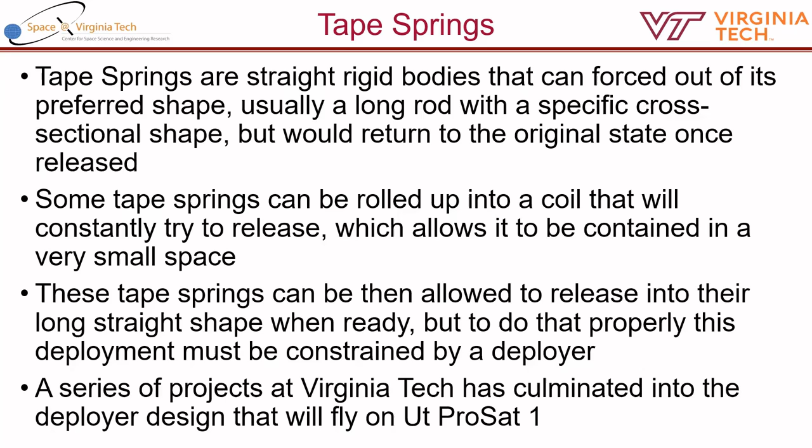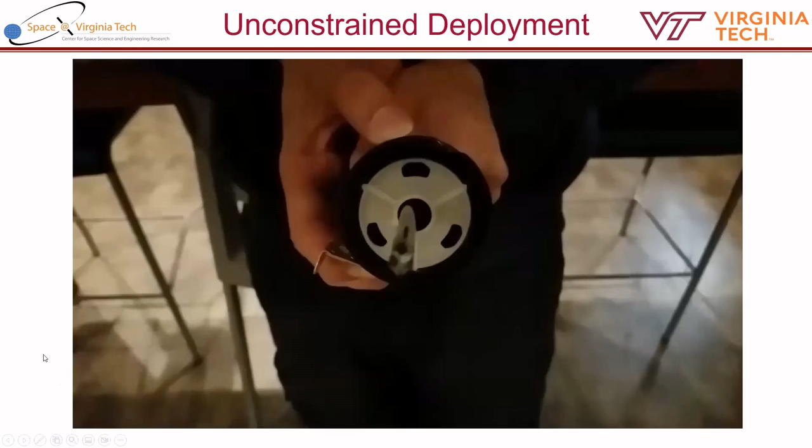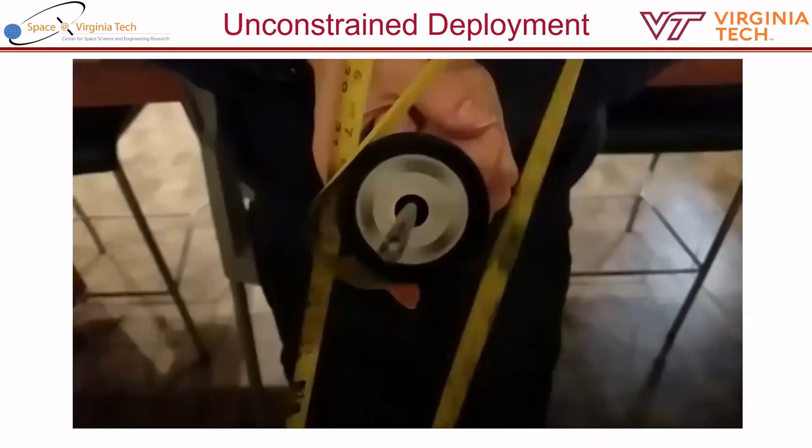Now, here's what an unconstrained deployment of a tape spring looks like. It's a bit glitchy.

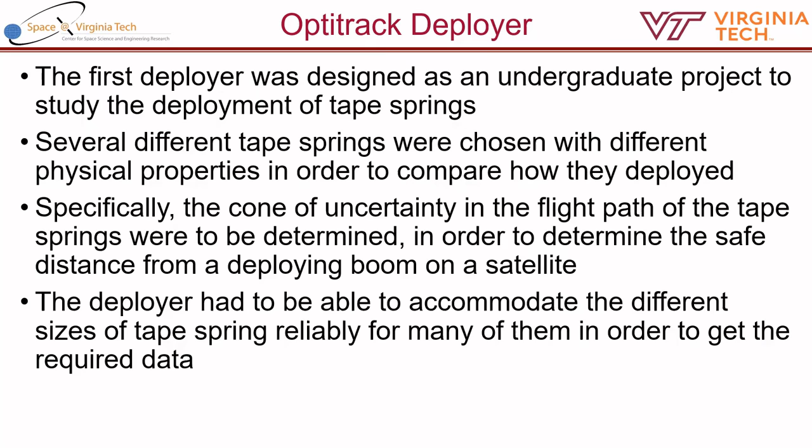The first deployer I worked on was designed as an undergraduate project to study the deployment of tape springs. It used several different tape springs to determine how their physical properties affected deployment. Specifically, we wanted to determine a cone of uncertainty in the flight path so we could determine if it was safe to launch close to another satellite object without hitting it. The deployer had to accommodate different sizes of tape springs reliably to get reliable data.

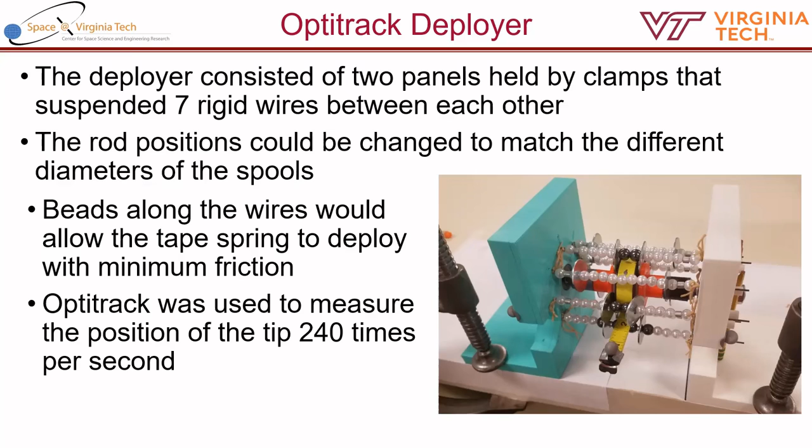So what we came up with as an undergrad was the first version: two panels held together by clamps, with 7 rigid wires suspended. The rod positions could be changed depending on the size of the spool we were using. We had simple beads that were able to roll and reduce friction during deployment. With this setup, we used OptiTrack to measure the position of the tip of the boom 240 times per second.

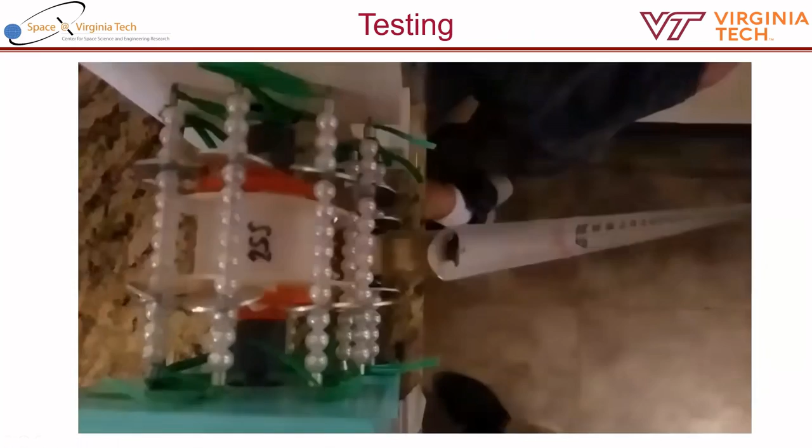That was a really fast deployment, about 5 feet. These are just general off-the-shelf tape measures, which are basically tape springs - they just have an internal torsion spring to make them retract most of the time. This deployer was very reliable, able to perform 50 deployments of each of the 5 different tape springs. Despite breaking in the middle, we were able to do repairs, but 250 deployments is not bad at all.

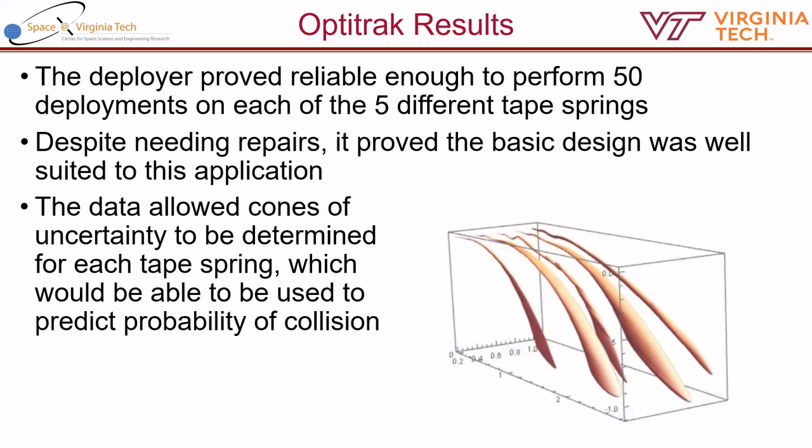With this data, we were able to create cones of uncertainty for each tape spring, which would allow us to determine the probability of collision with another object. You see this here, made in Mathematica.

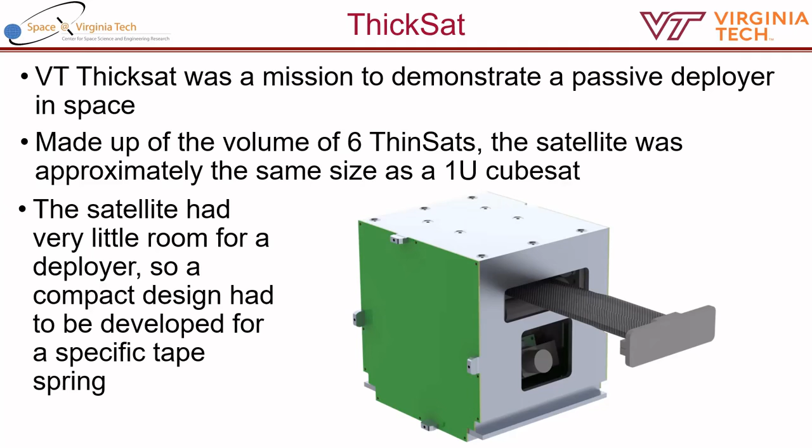Now, this went on to ThickSat - a mission I was put on that sought to demonstrate a passive deployer in space. It's called ThickSat because it was made up of 6 thin sats and ended up being approximately the size of a 1U CubeSat. The satellite didn't have a lot of room for a deployer, so we had to make a much more compact design developed for just one specific tape spring. This new tape spring was provided by NASA, much more sophisticated, made of carbon fiber layered with epoxy - much better for a space environment than whatever tape measures are made of.

This cross section is known as the double omega shape, which allows the beam to be very rigid - sort of like stretched omegas that are mirrored and attached at the tips.

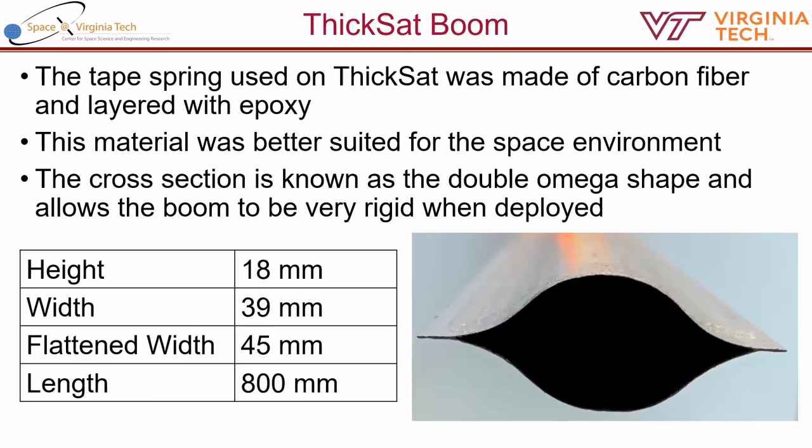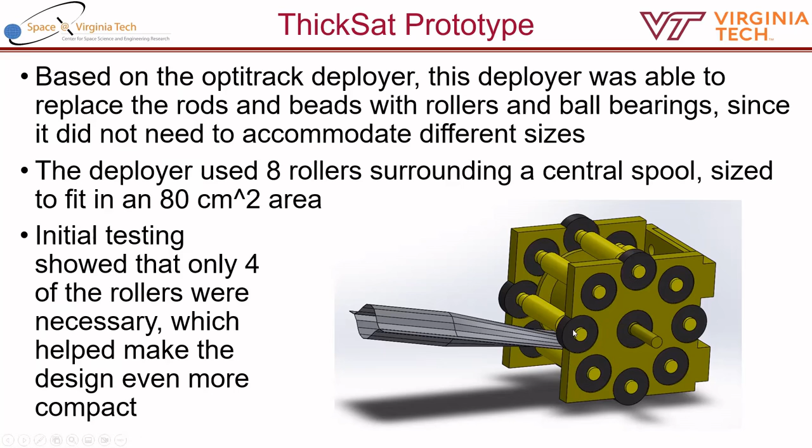The prototype we did was heavily based on the design from the OptiTrack deployer, because we were able to replace the rods and beads with ball bearings since we only had one size to deal with. It was all designed to fit in an 80 square centimeter area, and initial testing showed that only 4 of the rollers were necessary instead of all 8, which helped further compact the design.

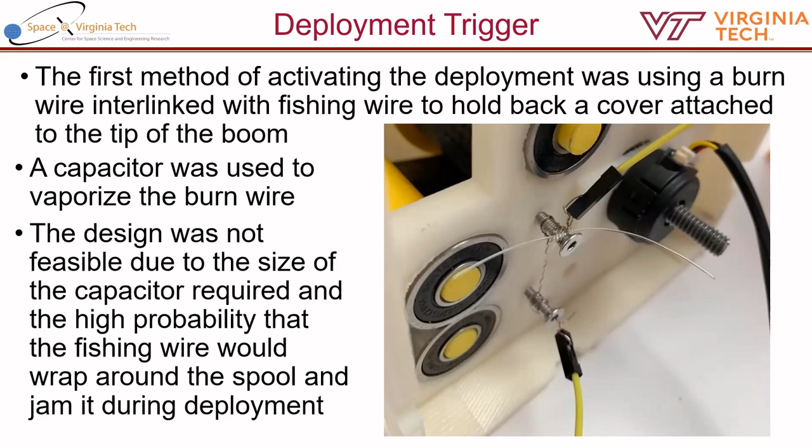What we needed for this to operate autonomously, which is brand new, we needed a sort of trigger that could operate by itself. The first method we tried was using a burn wire interlinked with a fishing wire that could hold back a cover on the tip of the tape spring. We had to use a large capacitor to vaporize the burn wire, but ultimately this was not too feasible, as the now-free fishing wire would often get stuck along the axle of the spool and jam it. Also, the capacitor was very large, almost an inch in diameter, if I recall.

The more reliable method, which would see future use, was attaching an arm to a servo that would fit into one of many slots on one side of the spool. When it was time to deploy, the servo would rotate the arm out of the spool, allowing it to deploy. This was a very secure design, as the rotation of the servo was perpendicular to the rotation of the spool, so the only way it could release under pressure was if the spool itself broke, which was nowhere close to ever happening. This became a staple in future designs.

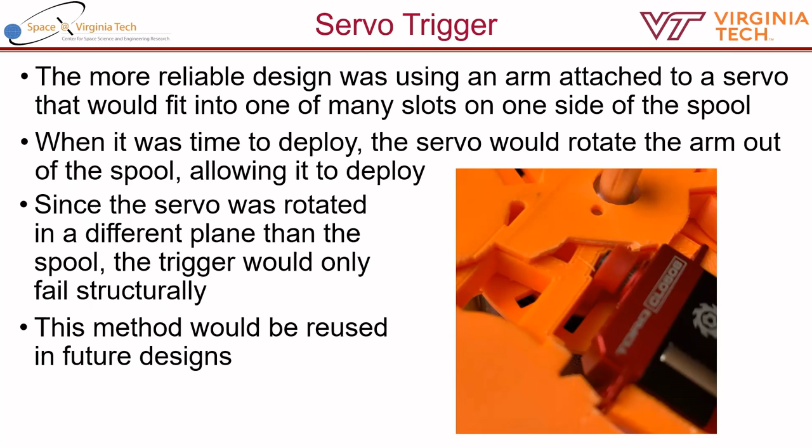The first successful deployment of this version then fell off, but it worked well.

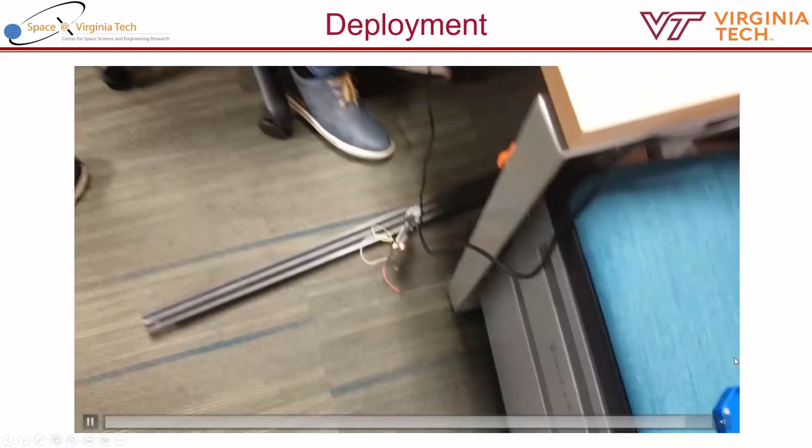We made some additional improvements for the final design. One of the corner rollers was replaced by two guiding rollers in the front to help direct the direction of deployment. We had an insert on the spool to put the base of the tape spring in, so it would be more secure. We made room for a camera attachment that would help confirm the deployment, and cut lots of holes into the side panels to save on mass. The structure was just two overlapping panels with screws, replacing something more sophisticated.

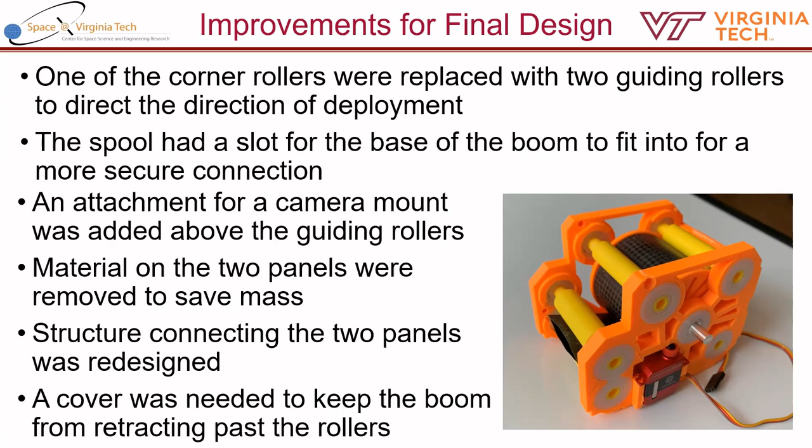We learned many insights about these types of tape springs. One is that when tested under cold temperatures, it didn't deploy as readily once it got below freezing. It appears that tape springs of this material lose a lot of elasticity when exposed to cold temperatures. This one in particular, likely due to its shape, suffered damage from repeated deployments in the form of cracks. Eventually that meant the tape spring no longer worked as well, and the deployer would stop working. Each boom could only survive approximately 100 deployments.

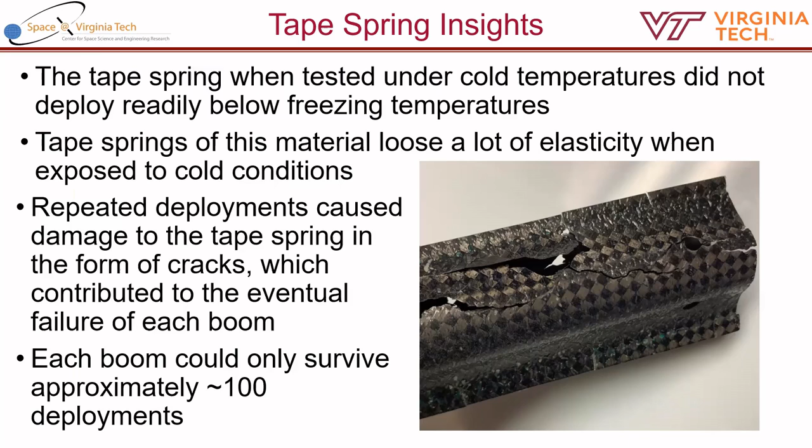So now this all leads to Ut ProSat-1, an upcoming 3U CubeSat mission. It has three payloads, the primary one being the boom deployer. The mission will last not 10, not 5, but about 2 days, depending on exact orbital configurations. The objective is to evaluate the reliability of the deployer by testing the deployment multiple times. Multiple deployments also help identify variables that affect whether the deployer succeeds, such as temperature.

Additional objectives include capturing acceleration data with an IMU at the tip of the boom. The results from this mission will give us insight into how viable this type of deployer would be for future deployable structures, such as on solar sails. One key feature that will have to be integrated into this deployer is a clutch mechanism so that passive deployment is not disturbed by the presence of a motor required for retraction.

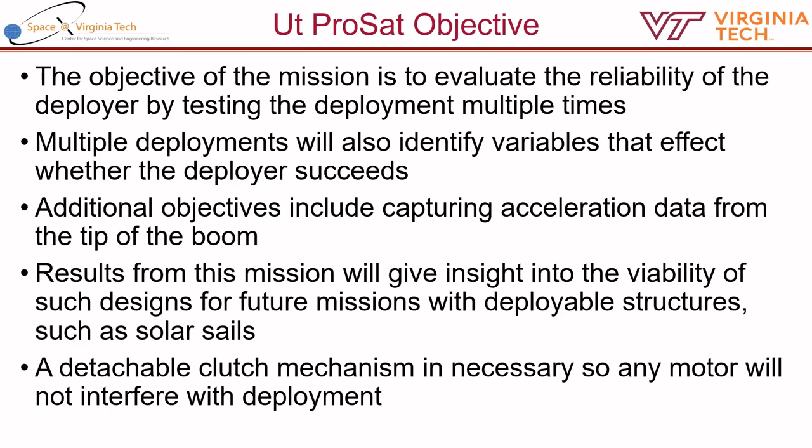For this mission, we had a new boom, considered bistable. It had the same material composition as the previous ThickSat boom, but was larger and had a different, now parabolic shape. The main feature of this boom is that it's bistable. While it acted similarly to the old boom, it had a straight configuration it preferred. Unlike the other, once flattened and coiled, it would actually stay in that coiled position unless slightly perturbed, in which case it would return to the original straight configuration. You can see the two different configurations here.

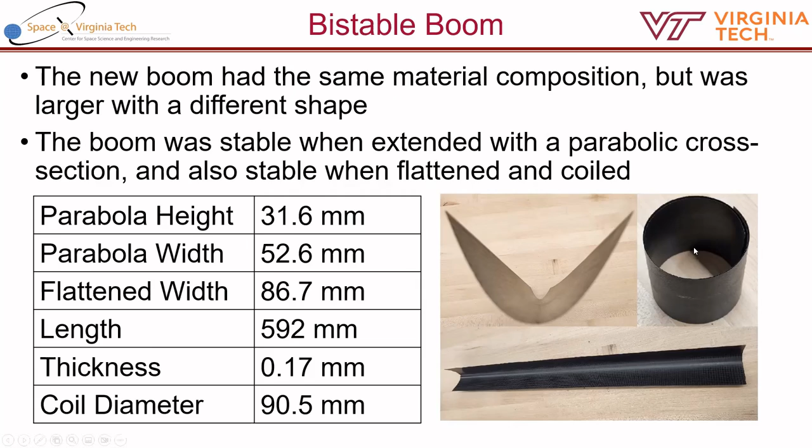The first step was to characterize this bistability, and we used an initial deployer heavily based on the ThickSat one just to get a general feel of it. But it was designed so that we could try multiple sizes of spool to see which one fit. We had a 50, 70, and 90 millimeter diameter, with 90 matching the bistability diameter.

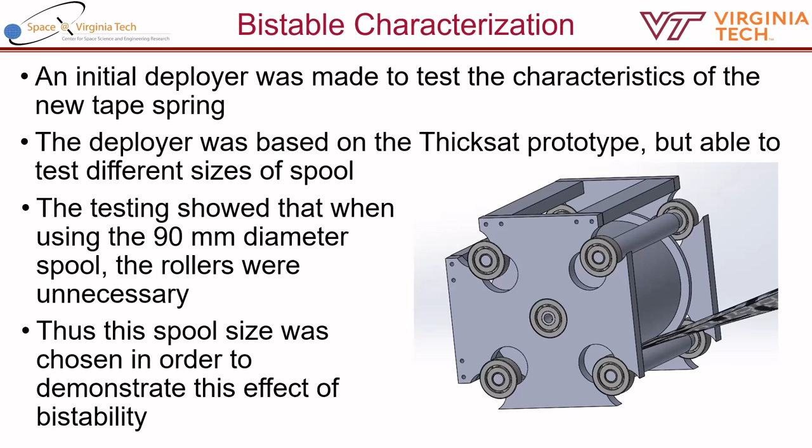We found that having the smaller spools made it act more like the Thicksat deployer, but we felt that the 90 millimeter spool was better, since it was bistable, it didn't actually need the rollers to constrain it, it just needed guiding rollers. This would also demonstrate the bistability, which NASA was very interested in, so we decided to go with the 90 millimeter diameter.

Now, the first thing we need to do is a clutch. The first serious consideration was using two face gears that, once connected, would allow motion to be transferred from the spool, which one face gear was connected to, and to the motor, which the other face gear was connected to. The first design had two solenoids for balance on either side that would push a ball bearing holder forward. The face gear here would interact with this one through a ball bearing. It had an insert that would go inside the ball bearing, and the ball bearing's outside was attached to this.

So that both of these would move together linearly, but could rotate independently. The face gear could rotate with the motor that was driving it, but this would stay static in line with the solenoids. The motor shaft was able to pass through the ball bearing directly into the face gear to allow this.

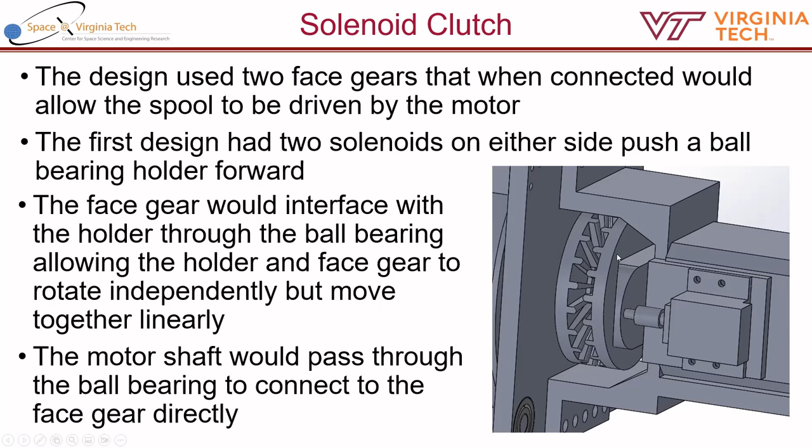But the solenoids did not seem to work quite as well, and due to constraints on the electrical design, we decided to go with a servo no matter what clutch design we used. So the first attempt to utilize the servo would have two arms with gears attached to a modified holder, and these gear teeth would fit into gear teeth on the new holder, and by rotating the servo, it would transform the rotational motion into linear motion with the face gear.

But there were difficulties with this design. It effectively had a really high gear ratio, so a lot of torque would be lost in pushing it, so it wouldn't have proved quite as useful.

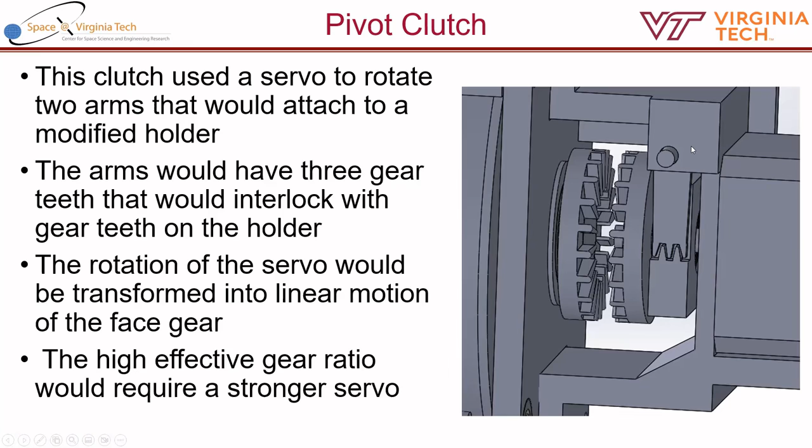The first successful design modified the holder so that it is now a gear, driven by a servo gear. With the threads on the inside matching threads on the frame, when this servo gear rotated, it unscrewed this gear, which pushed it forward and caused the face gears to mesh. It could also do the same thing, pushing it backwards. This actually increased the overall torque because it was a very efficient transfer of rotational to linear energy.

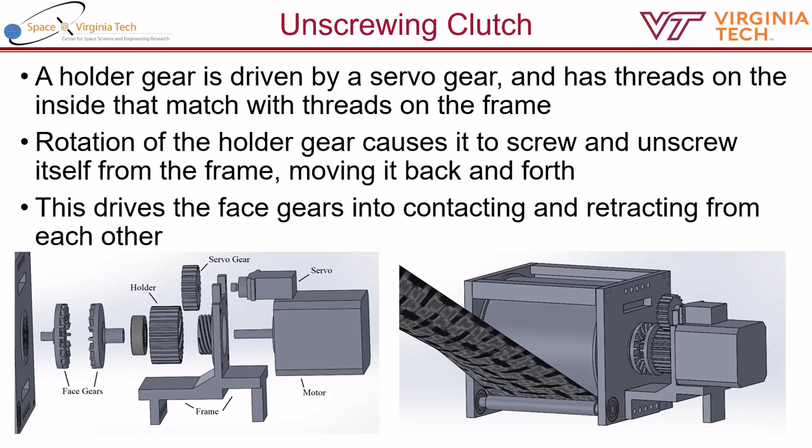So we went forward and made a prototype of this design. It performed very well. The face gears were able to properly clamp and re-spool the deployer, as well as allowing it to deploy easily afterwards.

One thing noticed was that the threads had to match precisely, or else the holder gear would torque slightly and jam the entire thing. Even when the face gears did not properly mesh, like if they just came in contact teeth to teeth, the pressure between them was still enough to keep them rotating and allow motion to be transferred.

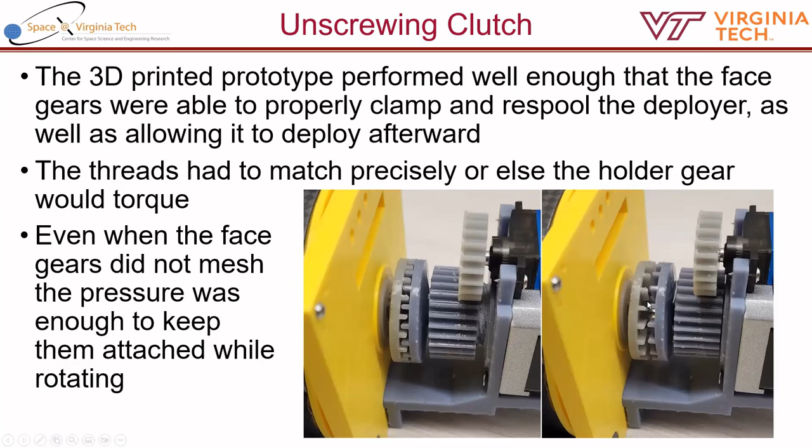While it was effective, the unscrewing clutch took up a significant volume, which was limited in the 3U area, 3U volume. Ideally, the mechanism would be placed inside the large available volume of the spool.

There was one derivation of this that involved moving the mechanism inside the spool, but it required a very large ball bearing, which would have been somewhat expensive and a bit infeasible for re-entry, as it would have large metallic parts that would be very likely to reach the surface.

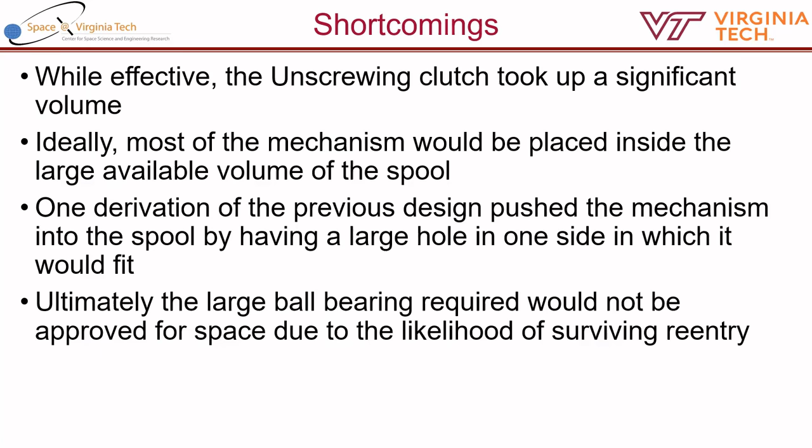So a new design using what's called the aperture clutch allowed the motor to be placed inside the spool in order to save space, and had a compact clutch mechanism embedded into one of the side panels. The body of the motor in this design is directly attached to the spool so that it rotates if the motor activates while the shaft is fixed, and it will freely rotate just together if the shaft is not fixed.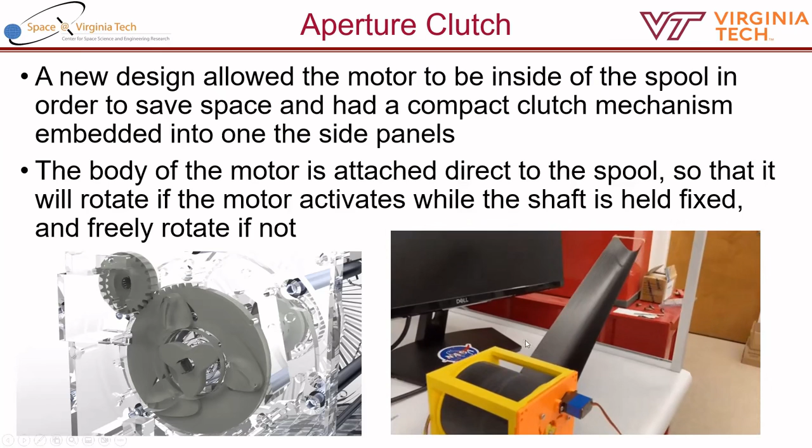We have a demonstration at the bottom of it, able to switch between the motorized retraction and the deployment. Here's a small visualization of the mechanism, which I shall describe in more detail. Next slide, you see the deployment again.

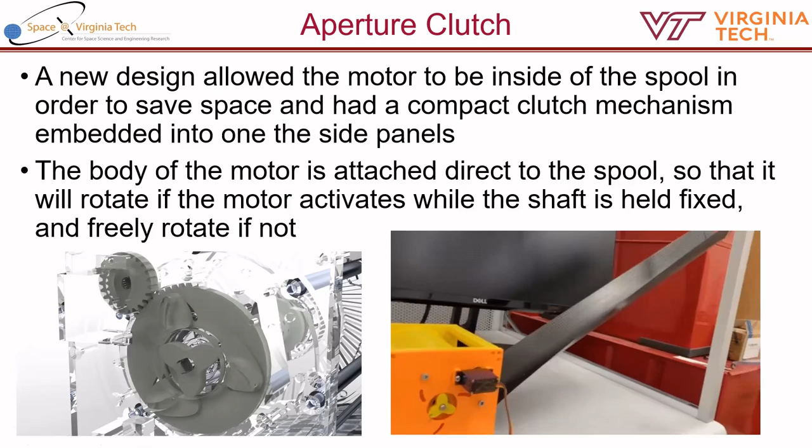Now for the aperture clutch, this works using a servo, and this servo, like the other one, drives a servo gear, which drives this ring, causing it to rotate a short distance. Now these three tabs have one peg that's attached to one place on the ring, and they have another peg attached to this groove. Then on the other side, they have another groove that's attached to this one. These grooves are identical except they're mirrored.

They intersect at one place that changes as the ring rotates. So as the ring rotates, this part of the tab is forced inward, surrounding this 3-spoked star, and wraps around it in the gaps between the spokes.

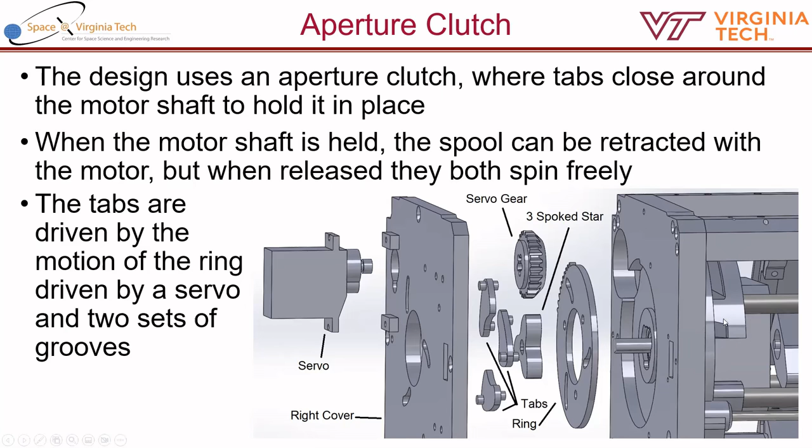This allows it to clamp onto the star, and this star is directly attached to the shaft. So once they're clamped together, the shaft is held fixed, and running the motor will instead drive the body of the motor instead of the shaft, driving the spool forward. But once released, the shaft, motor, and spool are free rotating, and the deployer can now deploy under its own elastic energy.

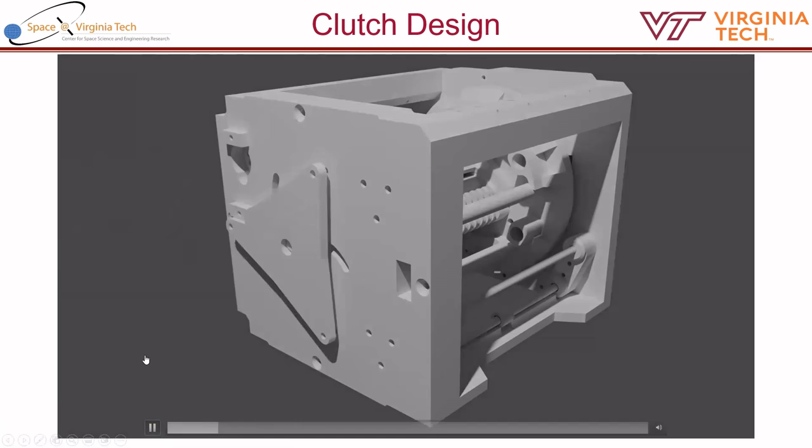Here's a demonstration of the working. Here's our deployment, and you can see the two grooves changing their intersection point. Let's do that again. The deployment tabs move inward, and now it can retract safely.

Now into development, we had a new boom, slightly smaller as requested, because we were concerned the boom we were using was a bit too large and too close to comfort for our 3U CubeSat. The new boom had a smaller cross section and coil diameter, but came with double the length at 4 feet. This one finally came embedded with electrical leads that allow power and data to be transmitted across the boom. This is how we're going to collect data from the IMU on the tip of the boom.

We made significant adjustments to the deployer. The bridges connecting the two deployers were adjusted so they could allow wires to pass through, allowing the mechanism on the right side to be connected with the electronics on the left side. The diameter spool was shrunk around the middle to accommodate the smaller tape spring, but the overall mechanism was not shrunk, in order to maintain easy compatibility.

The servo locking method from ThickSat was used as an additional fail-safe that would be in place before orbit, and it would trigger the first deployment, with the subsequent ones being used by the clutch.

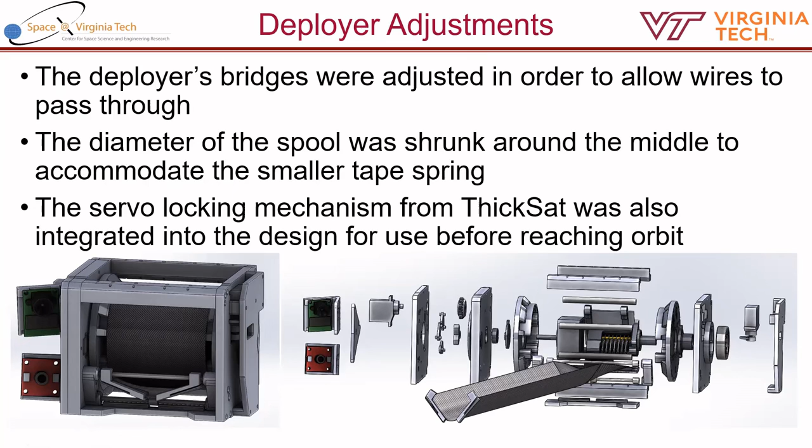This is a deployment of the close to final one, where we don't have retraction here. One important piece is the tip attachment. Like ThickSat, we don't want the boom to go all the way in. So we have a flexible cover that attaches onto two guiding rods. They're straight and only attach at the relatively straight parts of the parabola, so as not to interfere as much.

If this thing were to fail and the boom went all the way in, there would be no way to uncoil it in orbit. The cover also has hooks on top to catch one of the guiding rods up there, so it's a nice and secure connection for the final deployment, and very useful for the science team in determining how the boom is reacting under the IMU.

A torsional spring helps force a transition from flat to parabolic, just helping torque it a bit more so that deployment is a bit more energetic.

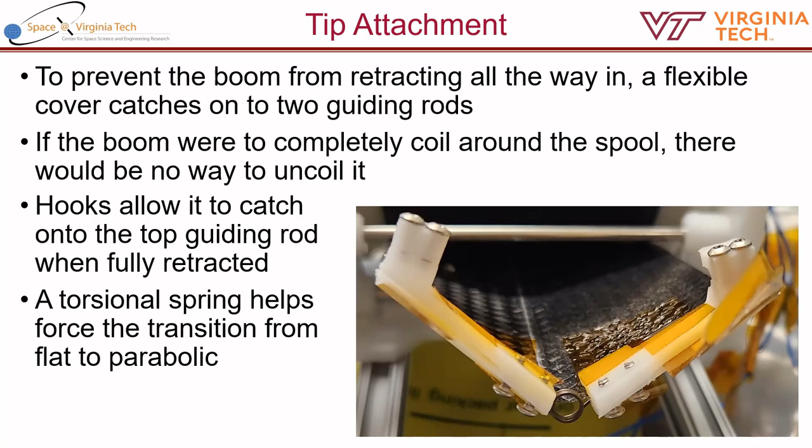Additionally, in order to transfer data from the rotating spool to the non-rotating rest of the spacecraft, we needed a slip ring, and we made an in-house one since there was not an easily available vacuum compatible one, especially of the size we needed.

This is why our design with the spinning motor works so well. For the IMU, we were going to need a slip ring anyway, so having the motor spin with the spool and be inside the spool wasn't a big deal. All we had to do was increase the number of leads the slip ring would accommodate, instead of adding this whole new thing.

Now, the slip ring is a simple one. The wires from the electronics are soldered inside the rings, and the wires from the spool are pressed against the surface of the rings using a torsion spring, but they're not actually attached, so they can slide across the surface.

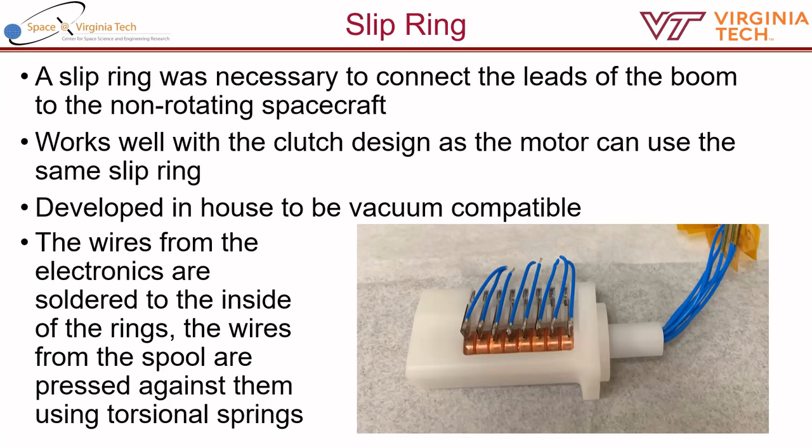Some basic instrumentation: there was a visible light camera that's going to take an image of the boom once fully deployed, for confirmation on the ground. An infrared camera that records the temperature, so we can determine how much of a variable that was, and it will be able to get an entire profile as the boom is retracting and deploying.

An encoder keeps track of the angular position of the spool, which is important because that's the only way the spool can determine its location autonomously. An inertial measurement unit, which we've mentioned before, takes acceleration data from the tip of the boom.

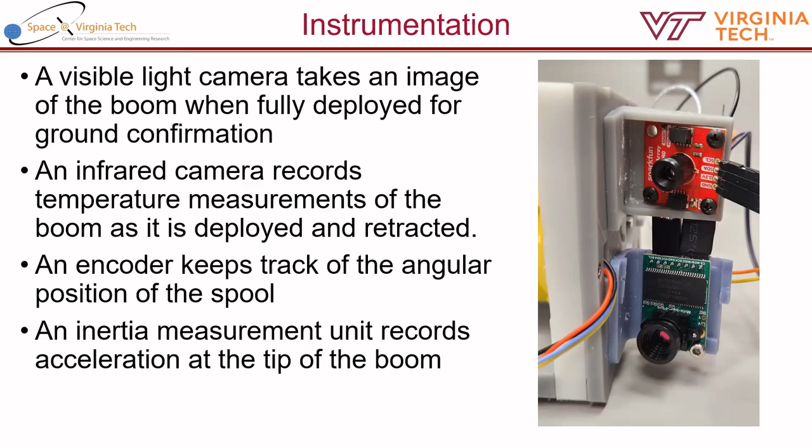We had some initial testing with the TVAC. This allowed us to determine how well it performed under hot and cold conditions while under vacuum. The boom didn't do as well under cold conditions, similar to what we saw during ThickSat, where the boom was less elastic when cold.

This is the first time we tested it with hot conditions, and it actually performed better than at room temperature. So there seems to be an overall correlation between the elasticity and the temperature.

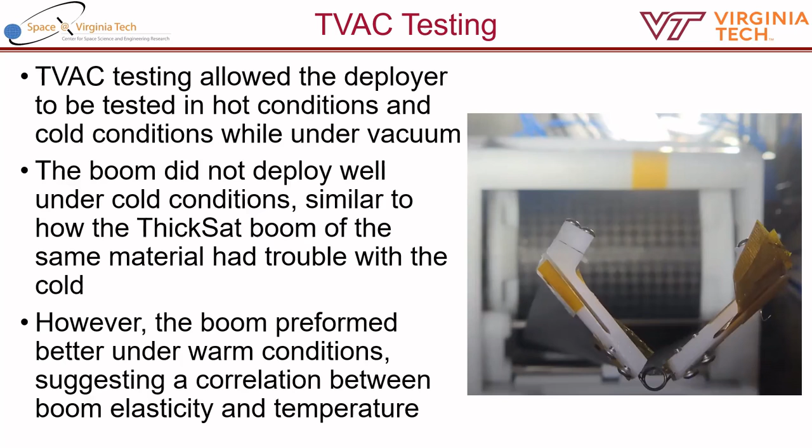The actual operations of this mission, the minimum success criteria is a single deployment to match what the ThickSat mission would have been. ThickSat didn't work, by the way.

Initial deployment will be confirmed by the ground before any retraction is attempted. Additional deployments will continue in the same manner while collecting less data over time. And if the deployer is reliable enough, it may be instructed to operate autonomously in between passes to allow even more deployments to be made between each pass.

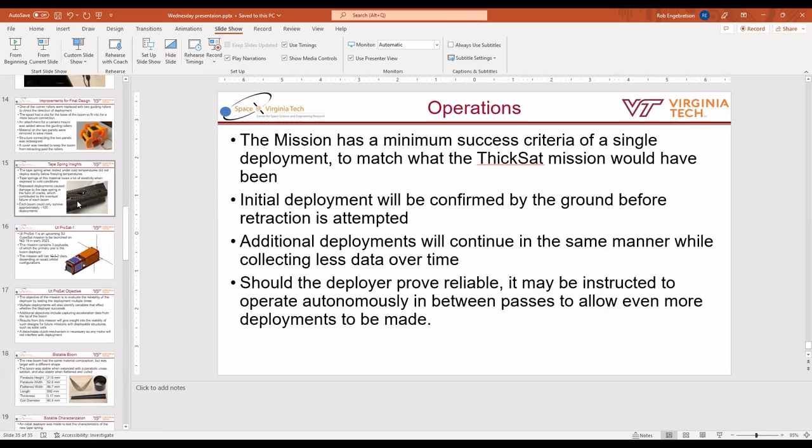I'll jump in for anybody that's online. So you mentioned earlier about doing the 100 deployments, and it goes more on the ThickSat design, and how you ended up kind of shredding some of the carbon fiber parts. Is that something you looked at as part of with SmallSat, in doing that, when it goes to autonomous mode, how many times you might expect it? Do you have that kind of resource available where you can basically wear one out, or again, that's not your flight one?

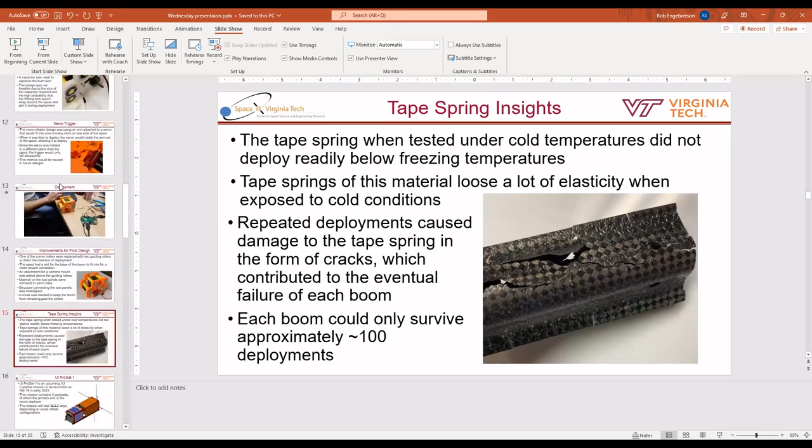Well, we are much more limited on the number of booms we have for this one, but we don't think breaking is as much a concern as with this one. This one had a very awkward shape, it would have been this omega shape, it would have been flattened and then curved. Meanwhile, this thing is a lot more like a normal tape measure type tape spring, so I don't think it has as much internal stress being placed on it when it's being compacted. And we didn't notice any deterioration under normal use. Mind you, there was one boom that was destroyed under some abnormal use, I would call it, but not during regular deployments. And even if it was on par with the 100 deployments of ThickSat, I don't think we're going to be able to get 100 deployments in orbit.

Yeah, I mean, I think so. It was also that the ThickSat one just seemed to be more energetic in general when deploying, and it also resulted in a sudden stop when it emptied. That could have also caused issues. This new one doesn't seem to have quite the same elasticity as ThickSat, so it's a much more gentler deployment.